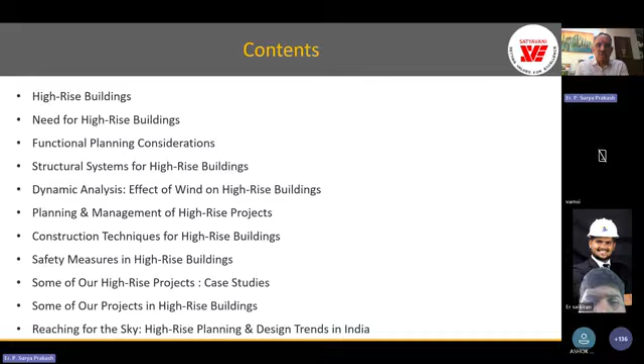Today I'll cover high-rise buildings, the need for high-rise buildings, functional planning considerations, structural systems for high-rise buildings, dynamic analysis, the effect of wind particularly on high-rise buildings, and planning and management of high-rise buildings, that is construction management. I'll also cover construction techniques available, safety measures, some of our projects and case studies, and high-rise buildings reaching for the sky. If time permits, I'll try to cover design trends too. So this is the order of my presentation today.

High-rise structure is a tall building, as we all know. Any building more than 15 meters, as per National Building Code, is called a high-rise building. Sometimes in residential contexts, we also call it multi-dwelling units. We know the need for housing is growing every day due to population growth and particularly rapid urbanization happening in India. Most cities and states are crossing 50% urbanization of the population.

So we have to think of how we can utilize the available land and still accommodate the growing population. That is the main demand and challenge that we engineers and planners have on hand. It's a tall, vertically oriented structure that influences design, construction, and performance, and of course maintenance and safety are very, very important.

Wherever land costs cross beyond, say, 3,000 rupees per square foot, it calls for utilization of high-rise buildings. But another challenge before we think of high-rise buildings is the access roads. Nowadays in some cities, though not as per the bylaws, people are building a 7-story or even 10-story building on a road width of just 30 feet or 20 feet. That's not to be encouraged or permitted by engineers because it affects the safety of people living in and around the building.

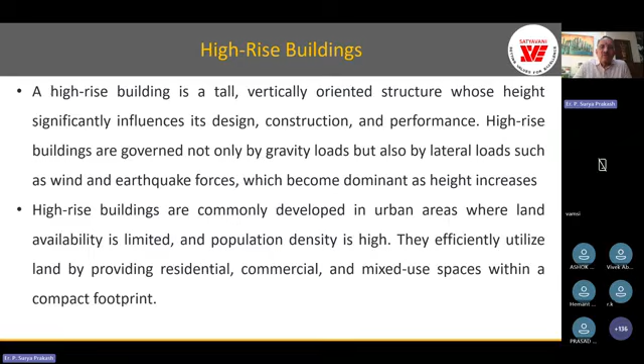We have seen what happened in Nepal post-earthquake—it is very difficult to evacuate, very difficult to rescue people, and providing relief is also very difficult. Even for a fire engine to reach the location in case of fire is very difficult unless you have the minimum road width for a high-rise building, which must be more than 15 meters. Even for a 7-story building, the minimum road width shall be 40 feet. So this is something we have to consider while talking about high-rise buildings.

Structurally, if we think about a high-rise building, it acts like a cantilever with adequate strength, stiffness, and stability to resist the shear and bending mainly, and overturning effects. This is the main thing.

This demands careful understanding of structural systems because, in fact, we all know the best designer in the world for skyscrapers is Bill Baker, who did the Burj Khalifa building. He made a statement when visiting India that in a design competition for a skyscraper, they will only first consider the structural system and the economy in the design. Because if we don't provide the right structural system, the cost of construction can even be doubled. So we also have to think of serviceability criteria of drift, vibration, and occupant comfort.

Occupant comfort - we have seen when the first skyscraper was built, the Empire State Building, people learned about designing window panes for wind and also to accommodate the drift and vibration during wind conditions. So a lot of codal provisions have come in for taking care of occupant comfort.

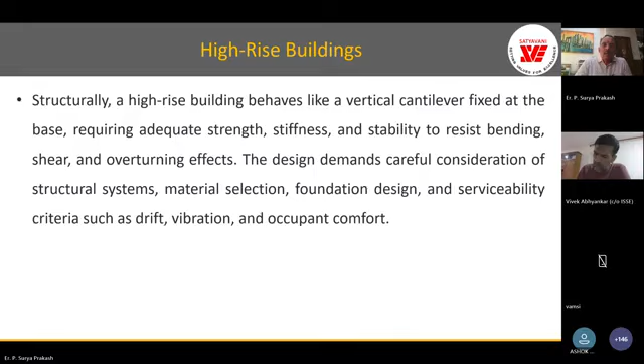When we talk about skyscrapers, Burj Khalifa comes first. I visited this during construction itself about 3 times, from foundation to finishing. It is so fascinating to see the concept of the structural system, construction methodology, and the time in which the building was completed within the timeline. The construction methodology, structural system, and buildability aspects are all best covered in this building. We can still call it the best and tallest skyscraper as of today.

Just yesterday or the day before, I saw that a Saudi Arabia building is just crossing this Burj Khalifa height now. So maybe until completion, we have to wait for it to be called the world's tallest. Burj Khalifa is the best tallest building in the world in structural efficiency and structural concept.

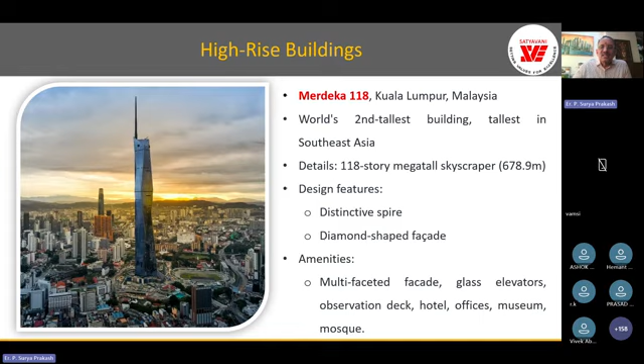Next, high-rise buildings - there are many. In fact, Merdeka, Kuala Lumpur comes next, the second tallest after Burj Khalifa. And we have the Shanghai Tower in China, with very interesting shapes. These are not just fascinating shapes chosen by the architect - these shapes are arrived at to optimize the loads in the building. Every shape has a purpose for minimizing the wind effects on these skyscrapers.

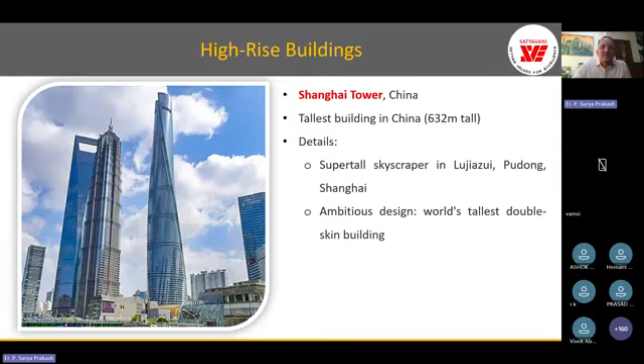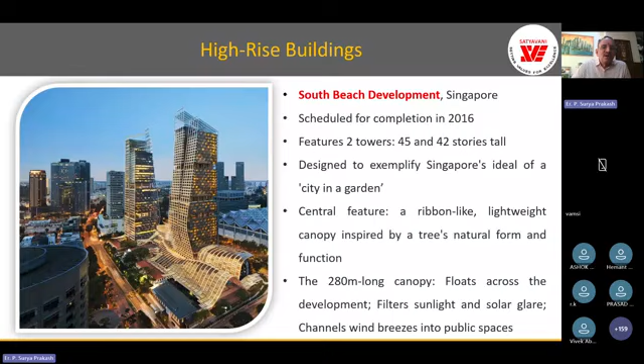I'm not going to the details of each of these. We'll cover the main topic of high-rise buildings happening in India. But for us to get motivated from what is already existing in the world, I thought I must share this.

The need for high-rise buildings is to optimize land use in densely populated areas. If you come to Hyderabad nowadays, in fact Hyderabad has better master planning actually. They have identified certain pockets which are called skyscraper zones, and encouraged builders to construct skyscrapers. Now Hyderabad has 60-story buildings and crossing more than that.

And the advantage is they have provided the corridor for infrastructure, whether it is approach roads, power, water, drainage, stormwater. All these are very important. Structural system definitely is important, but before the structural system stage comes, we should also think of all these utilities.

One Singapore funder told me, any FAR more than 7 will put a lot of stress on the infrastructure, that is the utilities. So it's very important to think of these things as engineers for us to encourage or propose this kind of skyscrapers or high-rise buildings.

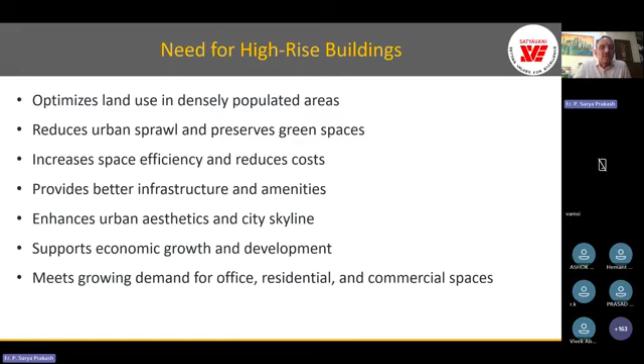So we have to think of these high-rise buildings wherever the density of population increases. Finally, the need for high-rise buildings is for efficient land utilization and rapid urbanization and population growth insist on high-rise buildings.

Installation, implementation, and then economic development and land value optimization also is very important. Reduction of urban sprawl, as I mentioned, optimal use of urban infrastructure, and advancement in structural and construction technology also will drive this growth of high-rise buildings.

We have seen after implementation, almost like 20 years, last 20 years, we have been implementing what you call Mivan or rapid monolithic construction. With that technology, the implementation and the buildability of high-rise buildings has become quite handy actually for engineers, for the contractors, for the developers, and for the builders.

So improved living and working conditions because of the compactness. Suppose you have 2 lakh square feet per acre, which will drive about 1,000 people living in an acre. And we are doing a project in 100 acres in Hyderabad, where the expected density of population is about 50,000 people - that means 500 people per acre on average in 100 acres, which is quite high.

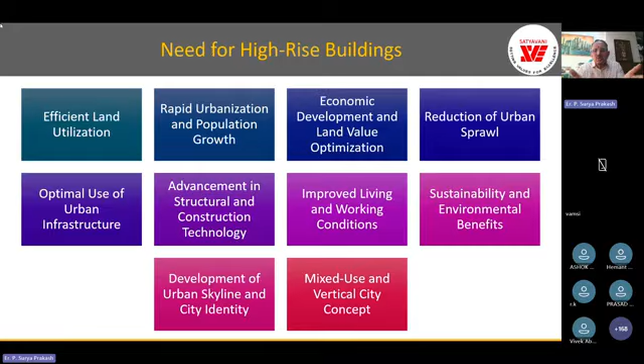So functional planning considerations: we all know individual dwelling units, detached, dual occupancy, and low-rise buildings, G+2 kind of thing, 3-story, 4 to 6-story, and finally 7 floors and above comes under high-rise category. From here, all today's topics will gain more importance because the cost of construction, the technology we use, and time required for construction will all affect the implementation of this project.

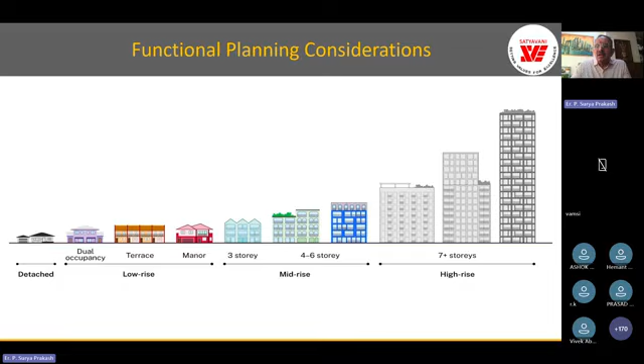So for planning consideration, I'll slightly cover this aspect because it's very important for all of us. Building use and zoning - the zoning, that is the development control regulations - we have to study before even proposing this, because that covers the aspects of social infrastructure availability, basic education, healthcare, all these things.

Next comes important floor planning in high rise. As we all know, as the height of the building increases, the service core percentage will keep growing. Normally it comes in 20%, the connectivity within the building plan, but it grows up to 50%, 60% even - the core requirement. So the core planning and core location are also very important.

Vertical transportation - whether it is elevators or escalators, speed of elevator, number of elevators, capacity of the elevator. We all must know there is software available for designing vertical transportation, depending on the number of stops and type of stops we propose, the population, and the time zones of population movement - whether it's a working population or a retired population. So we have to consider all that and design the vertical transportation.

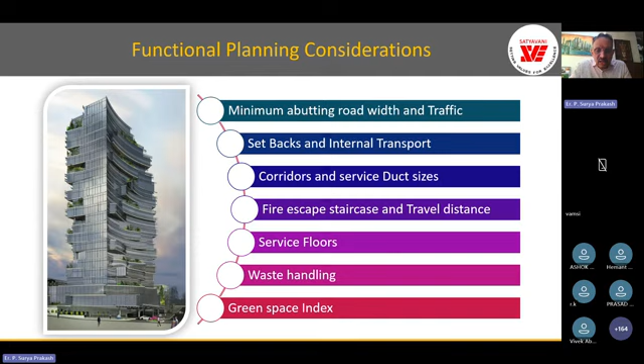And for relief areas, and then waste handling and green space index - that is very, very important. In Singapore it has become a compulsory thing to be followed: green space index. That means if you are constructing a building on 1 acre, if you provide greenery over an area of 4,000, then your green space index is 1:1. So we have to think of this green space index also when we are densifying areas with population.

Now, for us, the most important structural systems for the high-rise buildings. Let us see the structural systems of the available building, already constructed buildings.

Before that, let us understand what is moment resisting frame. That is the very basic system. For up to 7 or 10 floors, we can have just moment resisting frames. Beyond 10 floors, we must have shear wall systems, we'll add the shear wall. And then we also have dual systems, that is combination of shear wall and frame.

When I say shear wall, nowadays, the Mivan or rigid monolithic construction is with the complete shear wall system. And next is the tubed frames or outrigger systems.

These are further advancements. In fact, Fazlur Khan from Bangladesh, he is the first one to introduce these tubed frames. He is inspired from the bamboo, because bamboo tree is the natural tallest structure actually - tall in the sense of slenderness, from the slenderness ratio, height to minimum dimension. So he was inspired from that natural structure and then devised these tubed frames.

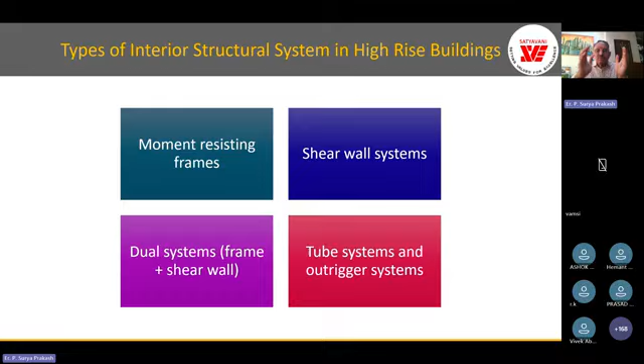And in Chicago, the first tubed frame, Sears Tower, it was the tallest in those days, during the 1970s, about 50 years back. And then the tubed frames have, after that, further advancements have come with the outrigger systems and buttressed core and all that.

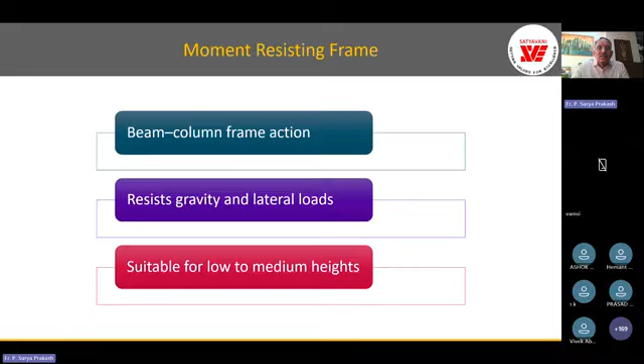Beam column frame action resists gravity and lateral loads, moment resisting frame, suitable for low to medium heights. As I mentioned, anything from 3 floors to even 10 floors, we can go for these moment resisting frames.

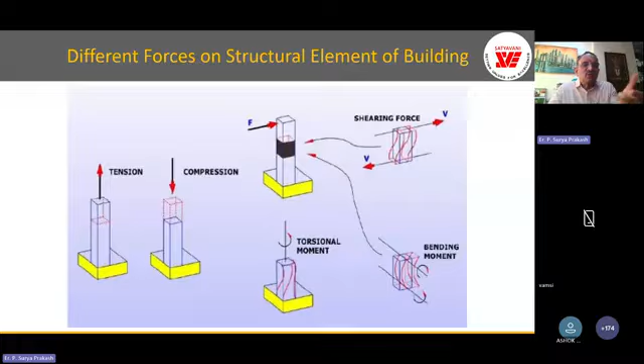As structural engineers and civil engineers, we must know the basic things, whether it is high-rise building or normal building: tension, compression, shear, bending, and torsion. These are the forces for which we have to think of designing and resisting using these capacities of the elements. So we should know which elements are good in resisting what - tension, compression, shear, bending, and torsion.

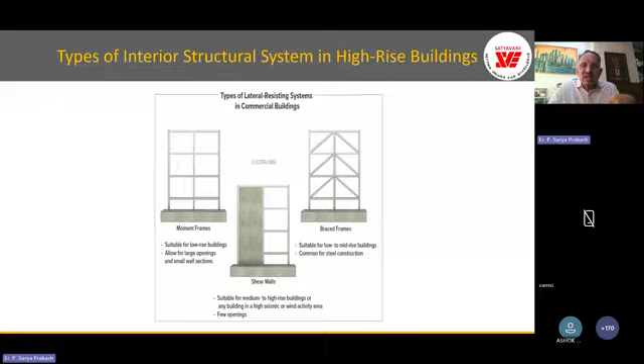That means we have the central core connected with the rigid diaphragm to the outer frame. So that is called the outrigger structure.

So now laterally supported vertical steel trusses in shear trusses resist the lateral loads, but main lateral loads are wind and seismic. And then braced frames, we have concentric braced frames and eccentric braced frame.

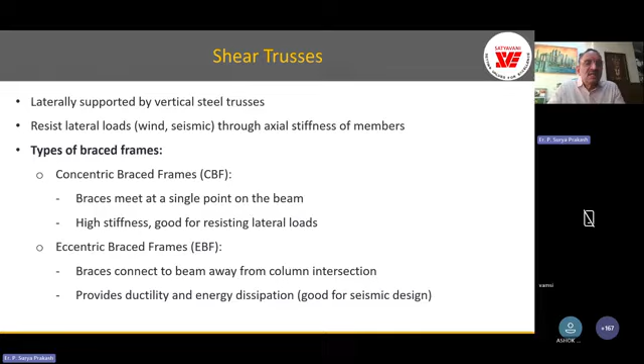So mainly, let us understand whatever structural system we are talking about is finally to dissipate the energy. And we can dissipate the energy with a little bit of flexibility in the structure rather than total rigidity, actually. That is the ductility we are talking about.

That's why we use steel also in the structural system, because steel is very good in ductility, but it has two disadvantages of fire resistance and corrosion problem.

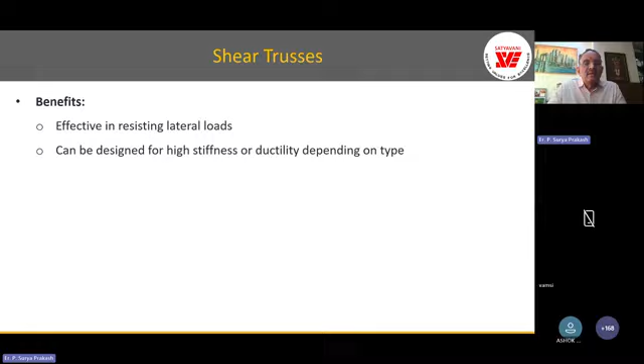Effective in the shear stresses, effective in resisting lateral load, and can be designed for high stiffness or ductility depending on the type of the frame.

Then coupled shear walls - two shear walls coupled with the beam connection will help. In a beam we have tension zone, compression zone. Similarly, a shear wall also, which is a very rigid thing - if you have two shear walls on the windward side and leeward side, then it acts as a beam with the coupling as shear connectors to these two stiff shear walls.

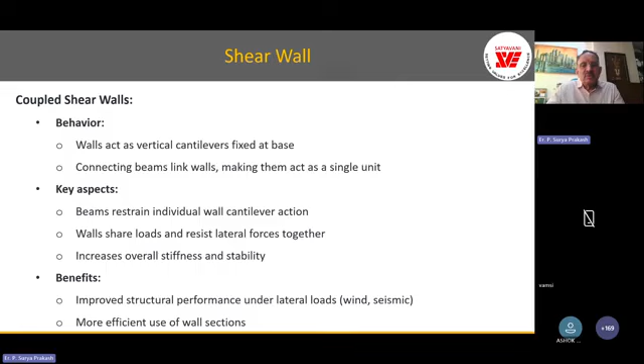Basically, shear wall is a plane stress element, and they share the loads and resist lateral forces together, improving structural performance under lateral loads, particularly wind and earthquake.

So let us look at this structural system like a braced frame and shear wall with base isolation. This is the basic structural system for any earthquake resistant or wind resistant design. For earthquake only, we need the base isolation. For wind, we need these bracings, which will be very effective, and shear walls in transferring the loads.

Now let us look at rigid frame construction, that is rigid monolithic construction nowadays, which is quite prevalent in almost all the high-rise buildings and tall buildings. This has become the norm. We have to understand the structural system of this, and the name itself indicates it's a rigid monolithic construction. The advantage is by the time we complete the structure, we have also completed the shell - that means walls, internal walls, and all that.

But the major thing is we as structural engineers have to insist on having the shear wall continued up to the foundation. In this picture, you can see at the bottom there are columns and a so-called transfer slab. We have to discourage this as structural engineers because in performance it's not very good, and cost-effectiveness also is very less, because we are not utilizing such a long shear wall from the top to almost parking level, and at the parking level we are terminating the shear wall. So we are not transferring the complete stresses to the foundation, and we are again creating a transfer slab which will transfer the forces from the shear wall to the columns.

Next, they're designed to resist vertical loads as well as lateral loads. And if there is any bad structural system, this is what is going to happen - failures without proper jointing and without a proper transfer medium.

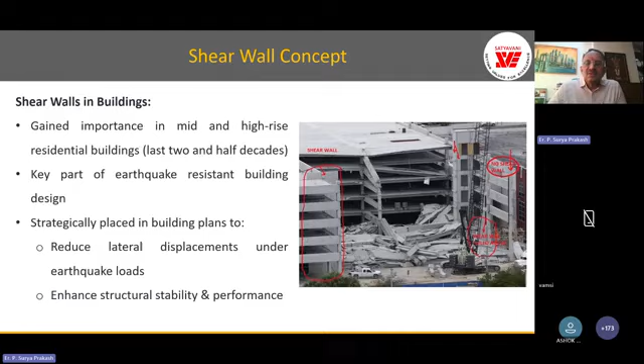So let us understand the shear wall classification: simple rectangular type, coupled shear wall, rigid frame, framed structure with shear wall, and column supported shear wall. This last one is what I was telling you is not very good.

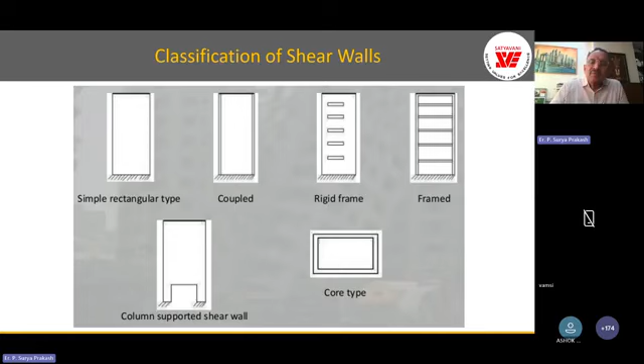And core type - any building requires staircase and lifts, and they are very good to implement with a concrete wall, particularly pressurized staircase and pressurized lift. Then you can have a core type, and you can connect the core. That's how this buttressed core concept comes, and you can have the shear walls buttressing the core.

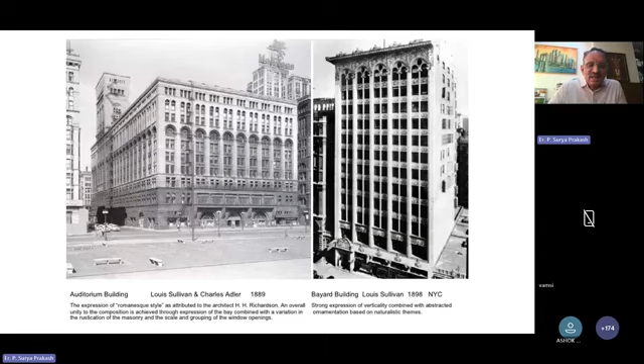These are more than a century old buildings that exist. These are all the structural systems of the braced frame, wall frames, and core system. I'll quickly show you the structural systems of some existing buildings, hybrid structures and structural systems - Chicago rigid frame structure.

And this is the interaction - you can see Park and Paulay, a book in which these figures explain how the theory behind this works in detail. I'm not going into the theory part, I am only covering the planning and design aspects. But we should understand how the lateral force is shared between dual systems like a frame and shear wall.

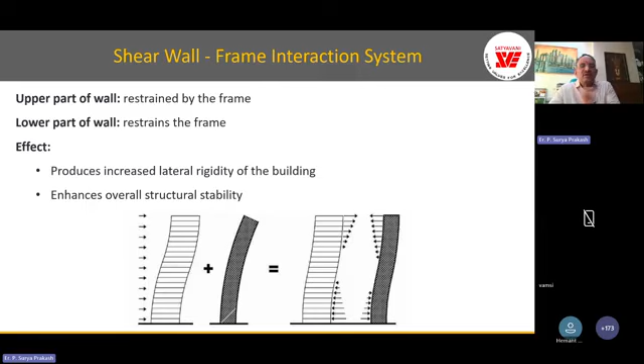Outrigger system - this is a very, very interesting concept. The outrigger system reduces the base moment drastically, almost by 50% or 40%. This is the braced outrigger system. The outrigger is like a belt system actually - you create one floor as a belt after every 10 floors, and that becomes an outrigger. Connected to the central core, it will reduce the base moment, as I have shown on the right side.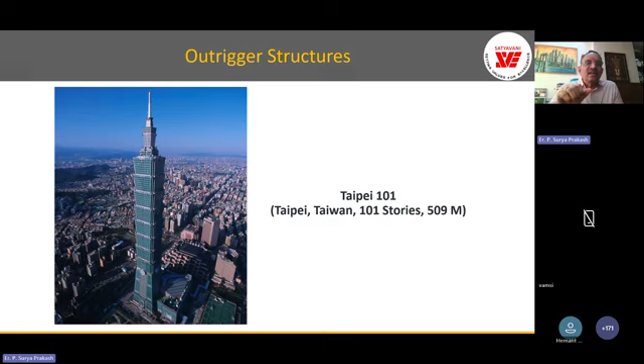Any good structural system will give aesthetics to the structure, like a well-built man being handsome. So a well-built structure will always be aesthetic.

The concrete brace tubes, steel brace tubes, and steel diagrid. Diagrid is very efficient in some cases. In fact, we did a pyramid structure 50 meters high where the diagrid saved structural consumption by 40% reduction. So diagrid is very efficient for some shapes and requirements.

Similarly, exoskeleton is another system. I'll show you some existing buildings with these structural systems. Super frame is another very interesting concept used in the World Trade Center, though it's not existing now.

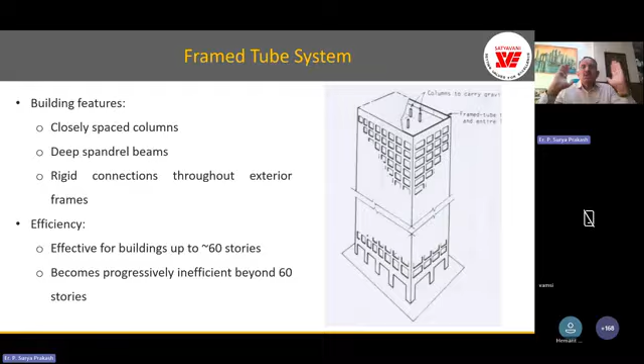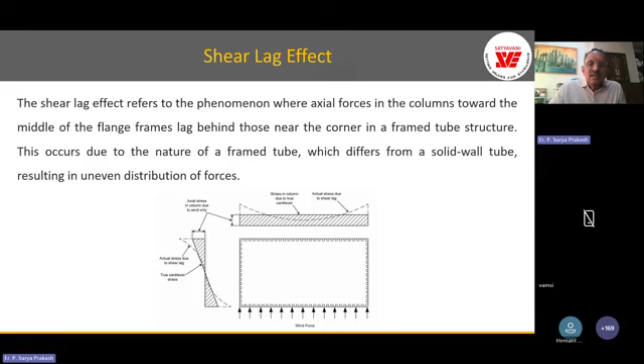So these are all frame tubes, meaning the outer core is designed to resist lateral loads, and the inner core resists only vertical loads. But shear lag is the major challenge in these frame tubes, because at the corners, theoretical shear versus actual stress can differ a lot. So we have to be very careful using this kind of structural system.

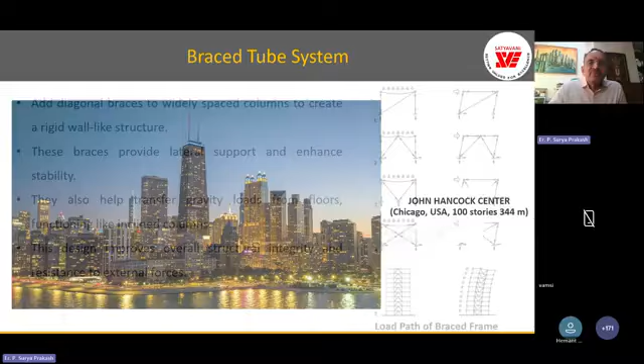Aon Center is a frame tube, then there are braced tube systems—we can see the load path in a braced frame. This is the John Hancock Center in Chicago. You see a lot of these frame tubes in Chicago because Fazlur Khan was from Chicago, and there's a Fazlur Khan Foundation encouraging more innovation in this area.

You can see the bundled tube concept, like the bamboo structure I mentioned—you never see a single bamboo standing alone, there will be a bundle. That's where the bundled tube concept comes from. To reduce and confuse the wind, you can see the staggering of these bundled tubes, which also resembles an outrigger system clubbing four tubes together.

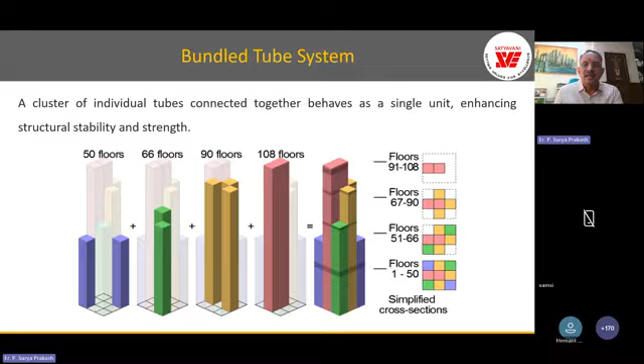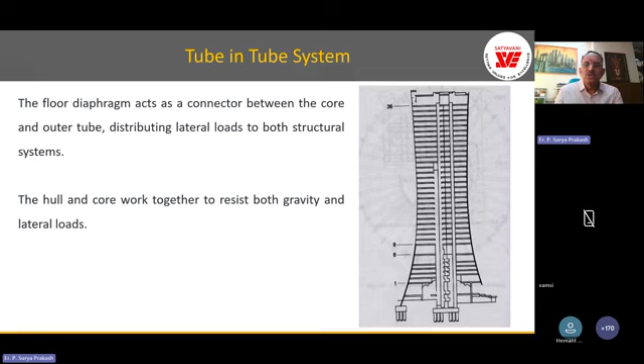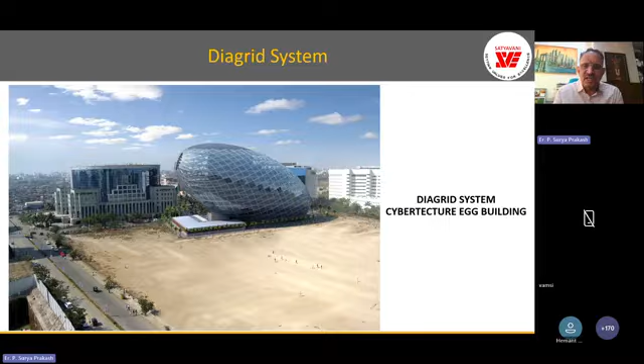Next is tube in tube—this is the West Madison Street building in Chicago, a 50-story building with a tube-in-tube system, and also a diagrid system example. This isn't a real high-rise, as I mentioned, only in certain shapes will diagrid be efficient. Super frame, as I mentioned, doesn't exist now, but it was one of the best structures constructed in steel.

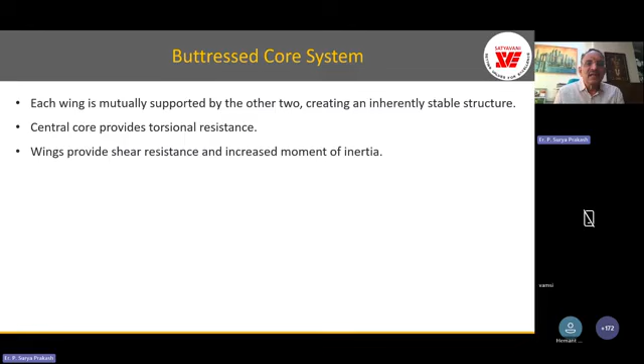Space truss—the Bank of China is a very interesting structural system with aesthetics and exoskeleton. This is a hotel in Spain—you can see how beautiful it is with the bracings, where the structure itself becomes like the facade. For a hotel, the facade is always very important since people connect to the hotel through its facade.

Next is the buttressed core, the latest and best system we've seen in Burj Khalifa, very efficient. When I visited this structure, in the basement the column size, minimum dimension, is just 500 mm for such an 828 meter tall building. So next, let us come to dynamic analysis and the effect of wind on high-rise buildings, because wind governs structural efficiency.

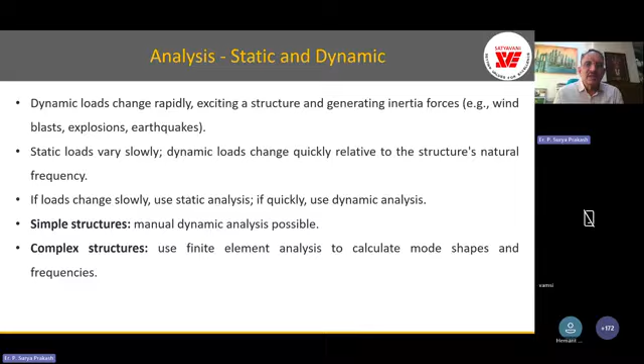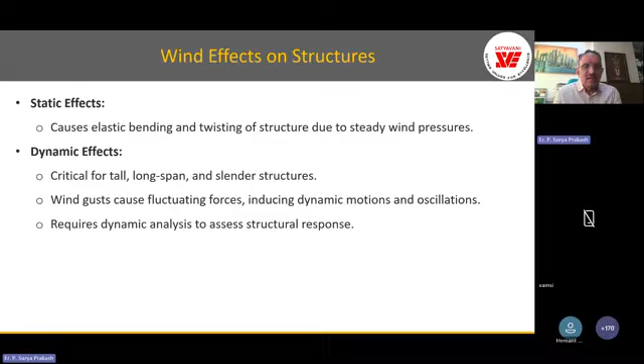For wind load effects, we know there are drag effects and dynamic effects. On the leeward side there will be drag effect. We have to study shear, moment, and deflection—these are the three things, covering both static and dynamic effects. So these all show how wind hits the building.

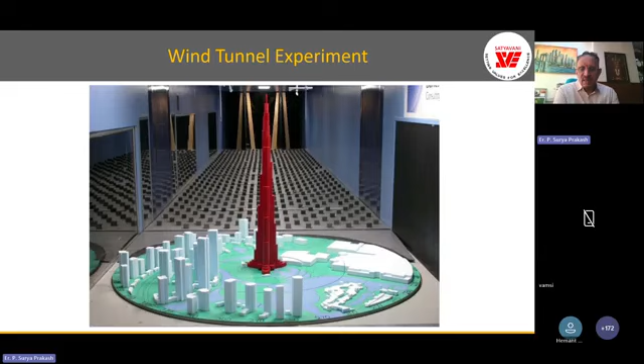I'll show you some wind tunnel studies. In fact, for Burj Khalifa, when they reoriented the building, they studied the wind tunnel effect again and found actual reactions were reduced because of the reorientation. These are wind tunnel experiments showing how wind affects a high-rise building.

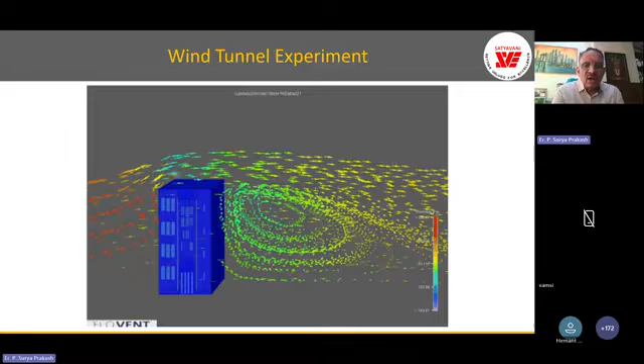This is a digital model of this wind effect. And if you have two high-rise buildings, you can see how it behaves differently. With multiple buildings, like in New York City, you can see how the wind flow affects them. So we should understand that we can never take the effect of drag on a single building in isolation.

That's why any high-rise building beyond 50 meters, it is better to recommend wind tunnel studies to understand the real effect. The codal provisions give you calculation of the drag effects, but don't go by just theoretical and analytical calculation. Go for wind tunnel studies and understand the wind. This is how wind is simulated in the wind tunnel.

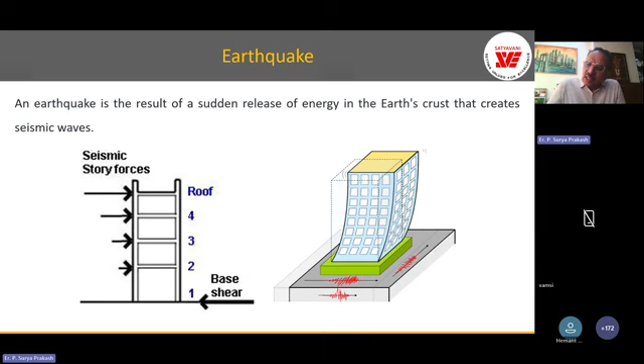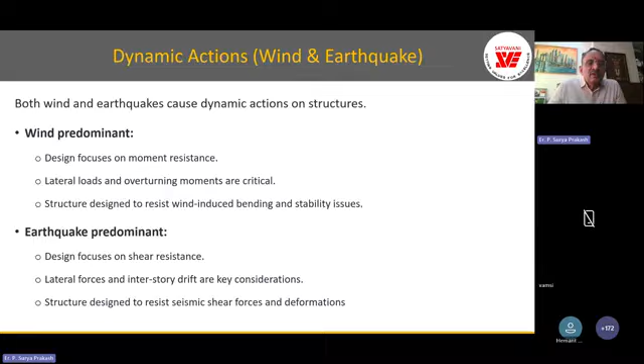Next is the earthquake. For earthquake also, we have shake table labs in Bangalore in CPRI, and in Delhi also I think, and there are two in Roorkee I think. So we have to do the model studies, whether it is wind tunnel or shake table. We can only do the model studies. There is wind predominant and earthquake predominant analysis. When earthquake predominance is there, we have to go for base isolation.

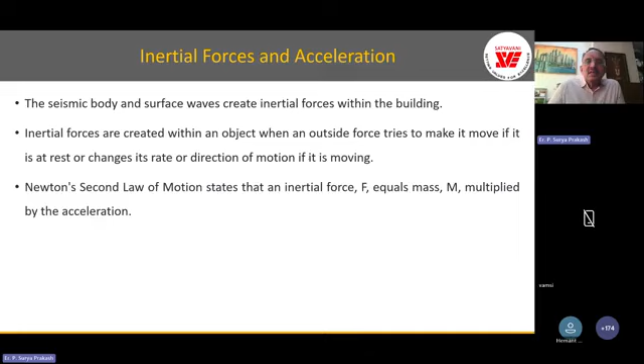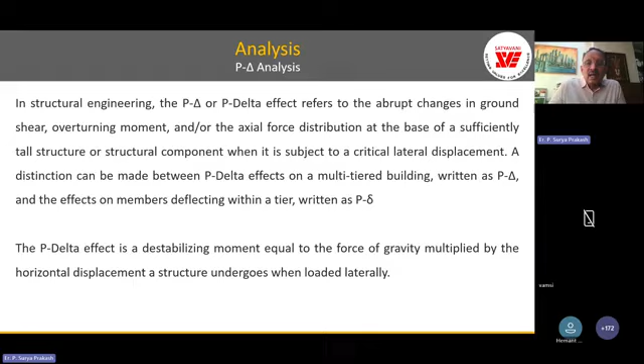So this is the earthquake accelerogram. We always design for earthquake using the accelerogram, and inertial forces, acceleration, and story drift in the analysis. We have to check the story drift because this affects the design of windows, doors, and facade. So even for the sake of facade, we have to do the wind tunnel studies. And P-delta effects, that is secondary analysis, nonlinear analysis, and also dynamic analysis to do for all these buildings. So for high-rise structures, I'll just show you some study that we have done in our office.

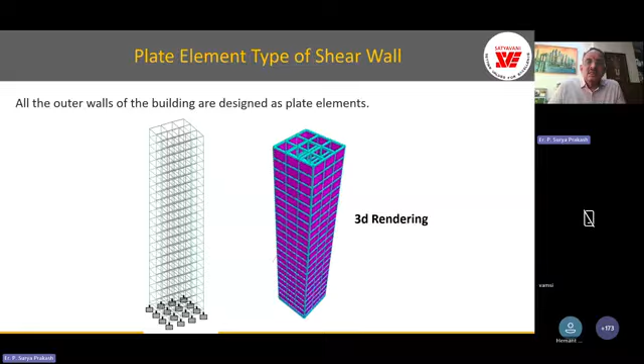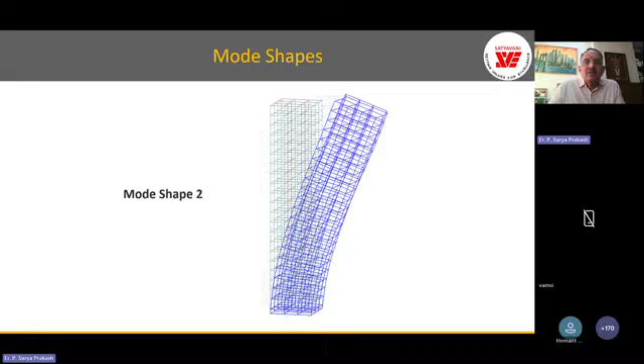Normally people tend to use plate elements when doing the analysis. So what I have done is I have modeled three types for the same building. One is with the plate element, and this is the stress diagram with the plate element in the type of shear wall. Then we have also used equivalent frame, like column and beam system. And we studied the mode shapes for the same structure. These are the mode shapes. We have studied beam column, plate element, and equivalent braced.

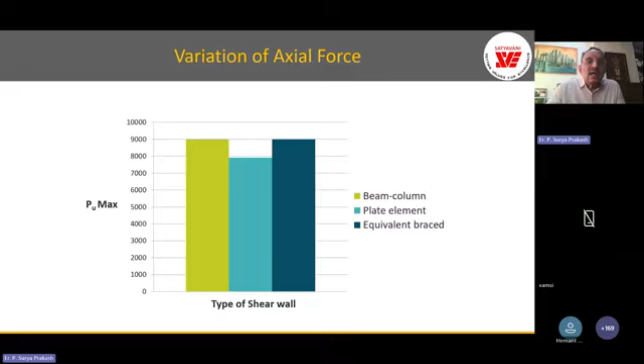Equivalent braced, you should also study with the plane stress element. For the same structure, same load, you can see the variation in the PU max. When we are using beam column and equivalent braced, we are getting higher axial load. You can see the variation is almost 12% from the plate. When you use the plate element, you will underestimate the axial loads by almost 12%. So we have to be very careful when modeling this high-rise building in usage of the right element in the finite element or STAAD analysis.

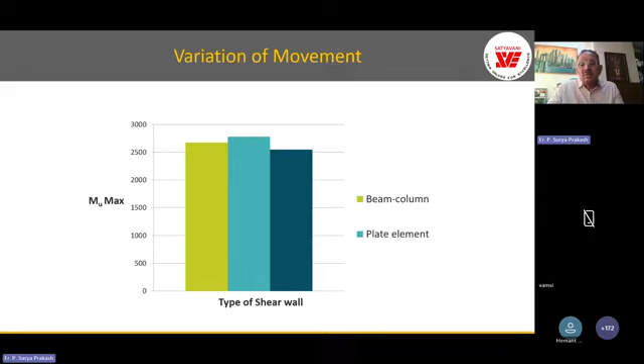And moment - sorry, the spelling is wrong, it's not movement, it is moment. Moment in the plate element is higher because plate element is basically a flexural element. Then beam column comes next, and then shear truss, that is braced column bracing system, gives the least moment. Next is the shear. In variation of shear force, beam column gives the lesser shear force, the braced frame gives more reasonable values, and plate element gives the higher shear force. So the conclusion is, better to use plane stress elements for the shear walls.

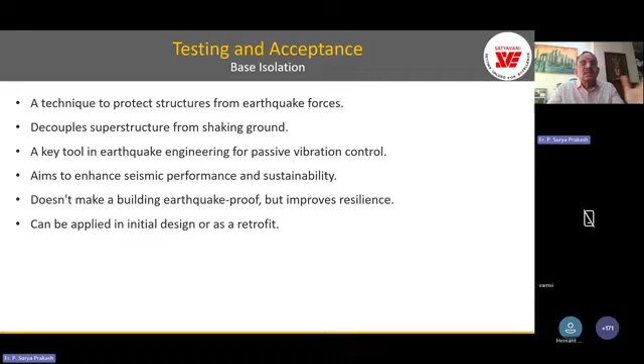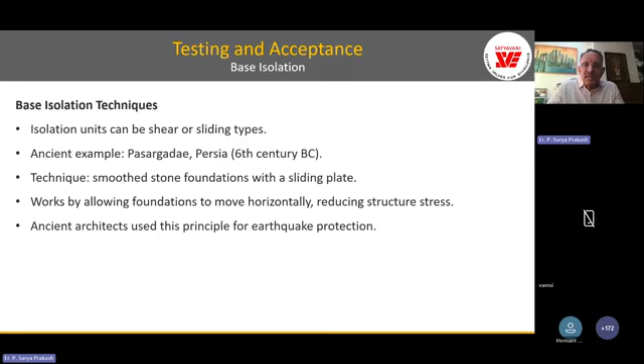Next is the planning and construction management of these high-rise buildings - time management, quality management, very important, building information modeling, and risk at construction management, that is controlling the cost, controlling the time. This is very, very important. So I'll briefly touch upon this construction aspect.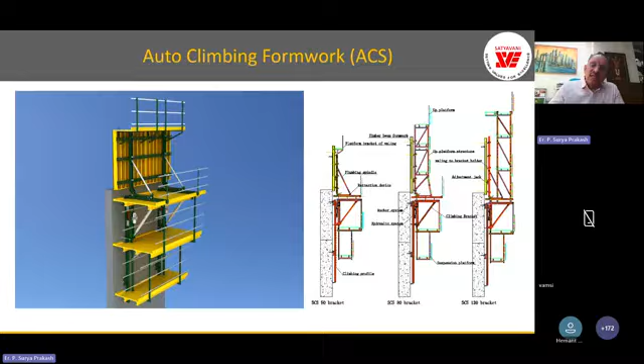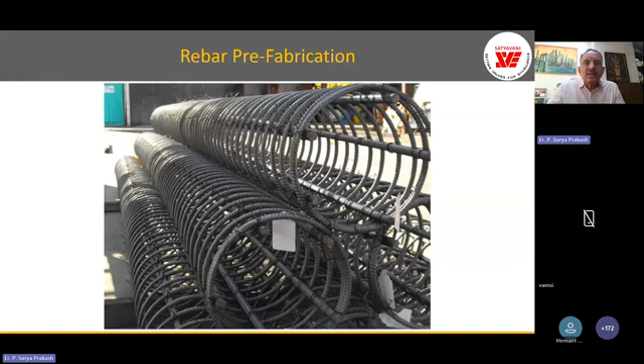The formwork, engineered formwork is very, very important, and safety during construction is also very important with the platforms, railings, and all that. Auto climbing formwork is a very efficient system for the core and shear walls, actually - we can use this auto climbing formwork. Next, the rebar fabrication, the accuracy in rebar placement and tying is also very important. So we have to use prefabricated rebar, which will be very good in quality.

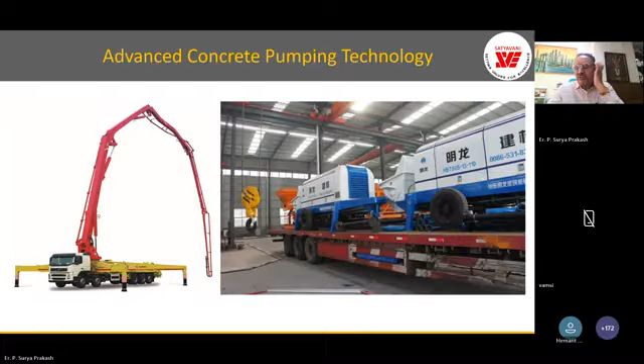Next is the concrete pumping. We have seen in Burj Khalifa, Germans have designed a special pump for pumping concrete up to 500-meter height. And in Hyderabad also, when we did the first tall building, we had to get a special pump from the ready-mix vendor. And next is the drop head systems for reducing the cycle time of this centering and formwork.

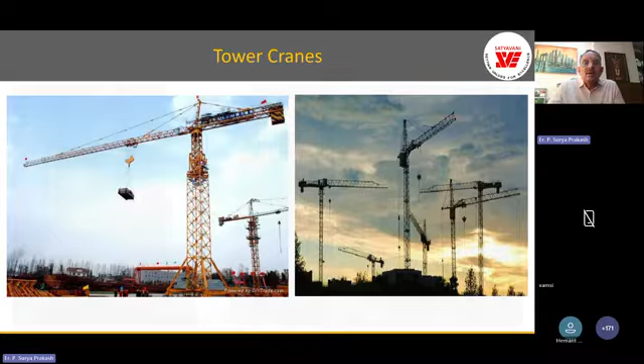And the major equipment used is tower cranes, we all know. And now we have these rope suspended platforms, and also builders hoists or passenger hoists or multi-purpose hoists that we are using in high-rise construction.

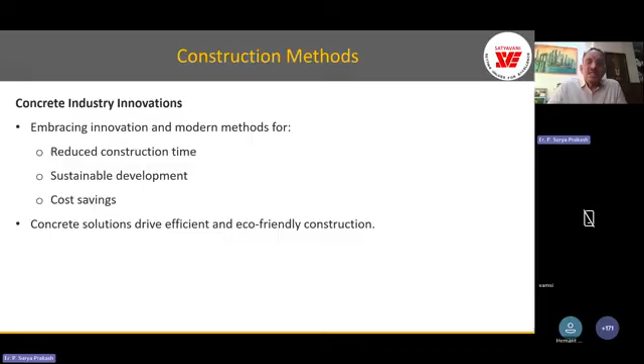So reduced construction time, sustainable development, and cost savings is in using these construction methods. And plumbing and electrical, firefighting, finishes, windows and doors design, and building envelope panels, factory fitted insulation and cladding, and it can be load bearing also, with factory quality and accuracy. So this is the precast flat panel system.

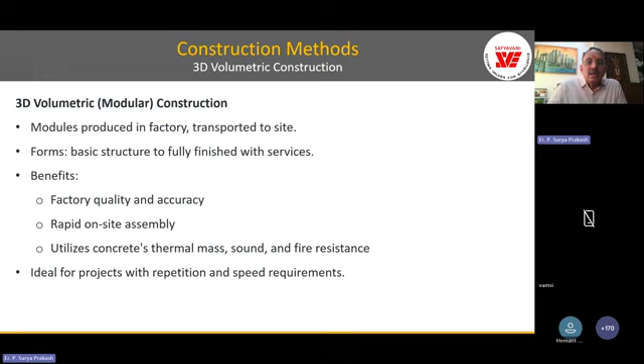So we have also done precast construction in Hyderabad, where we have done up to 11 floors, but my group has done up to 50 floors. So in precast, 3D volumetric is also coming up, and tunnel form for high-rise residential.

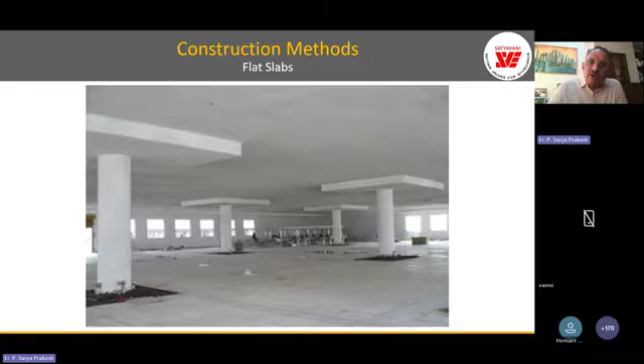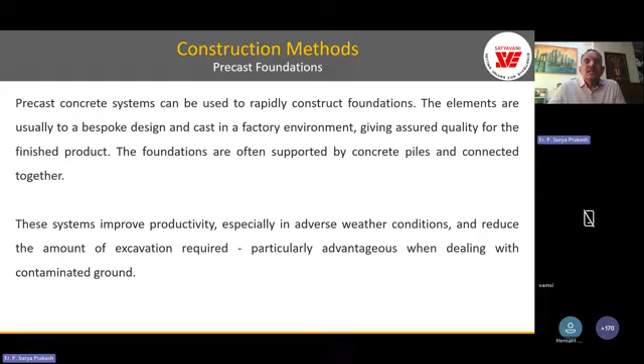And we have this rigid monolithic construction and flat slab systems with the table form we can do for office buildings, and hybrid concrete construction that is using precast and cast-in-situ rigid monolithic. That also we are doing in some of the projects, and precast foundations, pre-stressed concrete in hollow core.

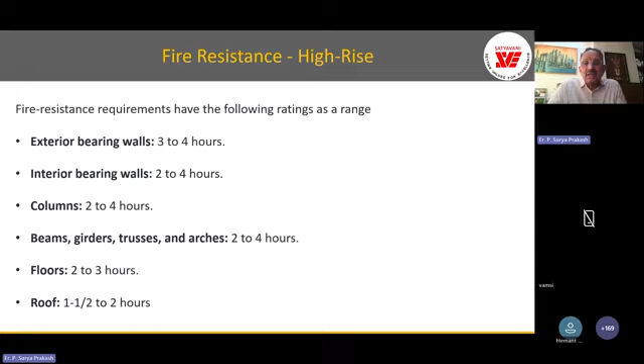And safety, fire rating of the walls and various elements, columns and all, we have to take care of the cover in the design. So fire safety is a very, very important subject. I'll not go into the detail, but we should be aware that we have to think of these things.

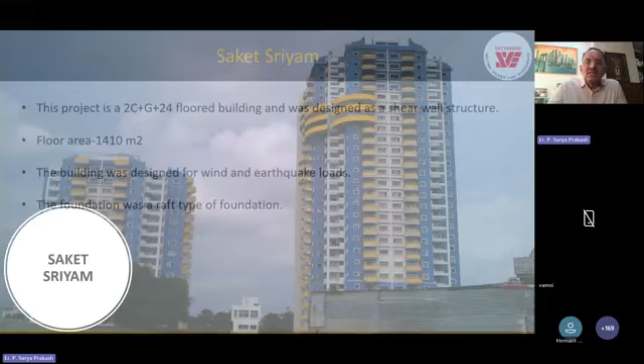So I'll just show you quickly some of the projects that we have done. This is the first tall building in Hyderabad. After this, many have come, but before this, the highest building was 15 floors. This we have done 30 floors.

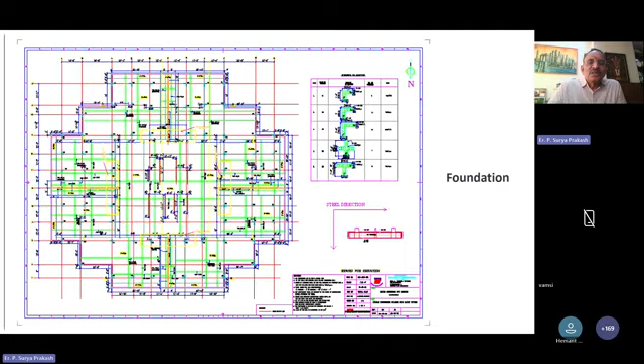And this is a buttressed system. Even before knowing about the buttressed core of Burj Khalifa, I had modeled and designed this as a buttressed core system. So these are all the plans of this building with a podium and two towers.

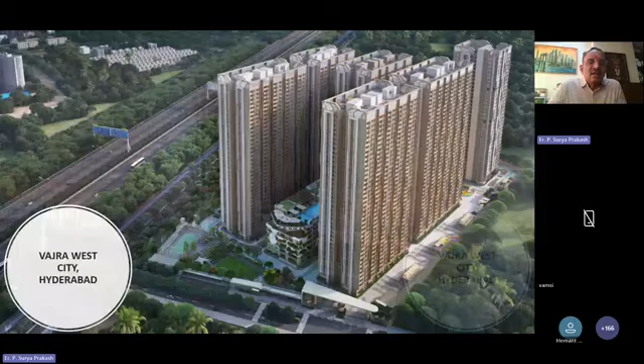Now the ongoing projects for us is in Hyderabad. We are doing construction management for this, and we are also doing in Mumbai. In Thane, we are doing a high-rise 36-story residential building, and this is ongoing construction.

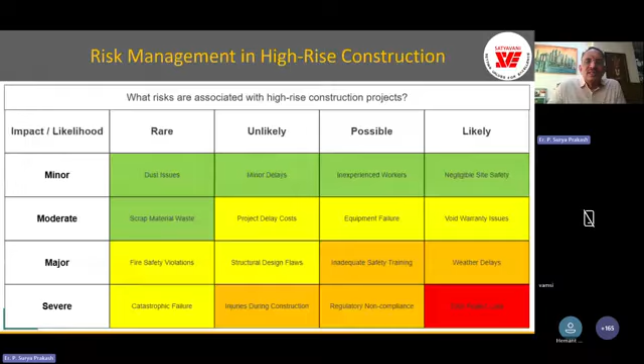So I think I'll try to conclude now so that we can have some time. This I'll not cover today because time is not enough for this.